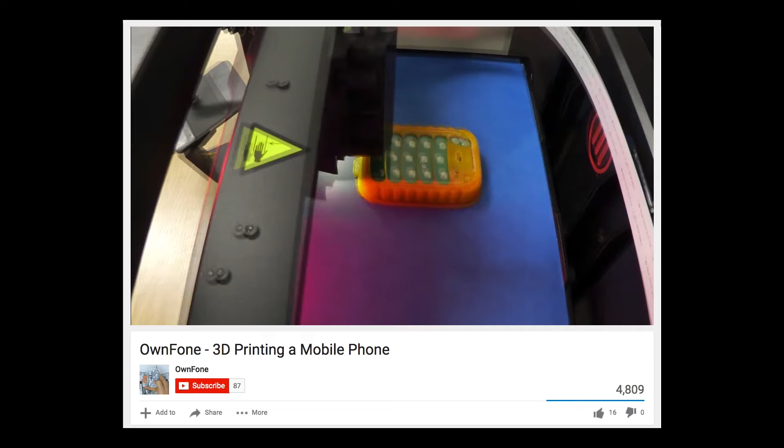So last year we talked about, again, the possibility of being able to 3D print a device like a cell phone. Well, we're starting to get in that direction here. Now, we just talked about 3D printing technologies where you could print a structure, a structural shell, for example, for a cell phone, and then be able to print the interconnects using pick and place to be able to drop in chips, device chips. You could start seeing this become more of a reality.

So for me, I've been involved with additive manufacturing for about 25 years. Our first part prints were for the Sonic tray we designed here at Magnet. I printed those parts and presented them at the design review, and the engineers that we did the work for just about fell off the chair. And so right then I realized how impactful additive manufacturing is, can be, and is going to be.

One of the things we do here at Magnet is to engage companies in the additive manufacturing sector and then bring that technology to people that might not normally use it. So you wouldn't think of a stamper as being somebody that could use additive manufacturing to make parts, but we can show you how to do that. Same way with injection molders. Same way with people that do textiles. So that's where I see a huge transformative element to this technology.

The classic quote I recite from Terry Wohlers is the fact that if you're not running in this space, you're falling behind. So what that means is companies should have a bullet point on their monthly strategic meeting: what are we doing in additive? And if that isn't there, they're falling behind, because additive is on an asymptotic growth curve and there's no stopping this technology. Some of the supply chain transitions that we are in the preamble of right now are going to be transformative. Because this technology is evolving, we're going to be able to print faster, better, stronger parts.

One of the interesting aspects of additive manufacturing is that we can take a scan from a part, regardless of where that part came from, get it into our CAD system, manipulate, modify it, and actually make that part. So there are some issues potentially with people actually getting into copyright infringement. Very easy to do that. So this is a good example of reverse engineering a part.

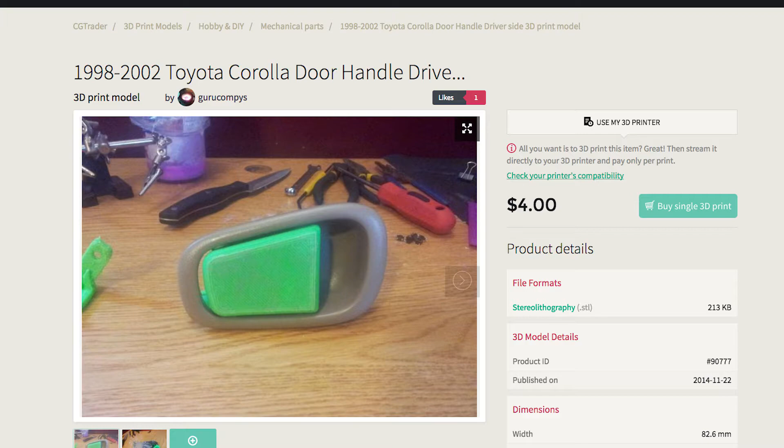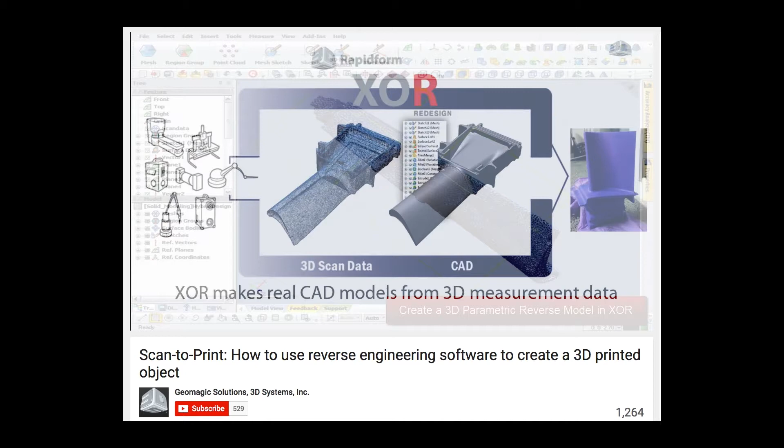We know that some of the smartphone companies have purchased 3D scanning companies. So we could start seeing this technology being democratized. At the same time, there is a need for precision scanning, and there are companies out there that are trying to meet that challenge. And the real issue with precision scanning is reverse engineering. Reverse engineering of spare parts, reverse engineering of hard-to-find parts. That's where precision 3D scanning can be necessary in order to have a part that may fit into a larger system such as an automobile or an aircraft.

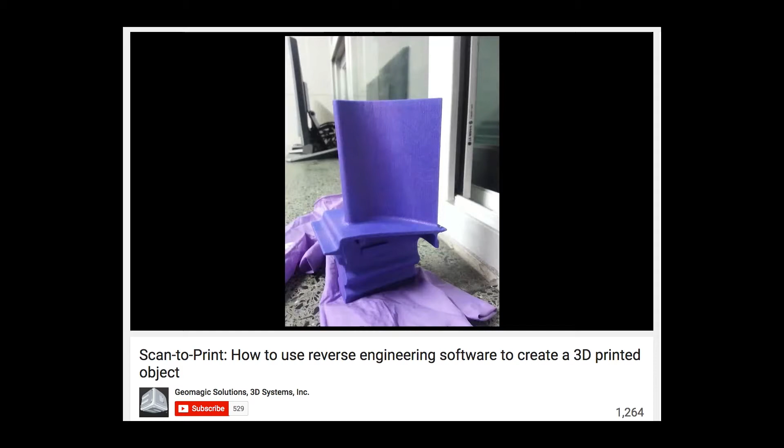Talk about spare parts. Lowe's Innovation Lab recently partnered with a company called Authentise to put 3D printing in stores. It took 6 months to pass legal review, I'm told, and I'm sure even then there was a highly qualified yes, and Lowe's was apprised of the risk. Spare parts like automobile parts can be scanned and printed. We know this. Some companies are understandably concerned about their customers having the ability to scan replacement parts for the big machines they purchased instead of purchasing the parts as they always have from the OEM. It's a significant loss of revenue and creates product liability issues, warranty issues, IP issues.

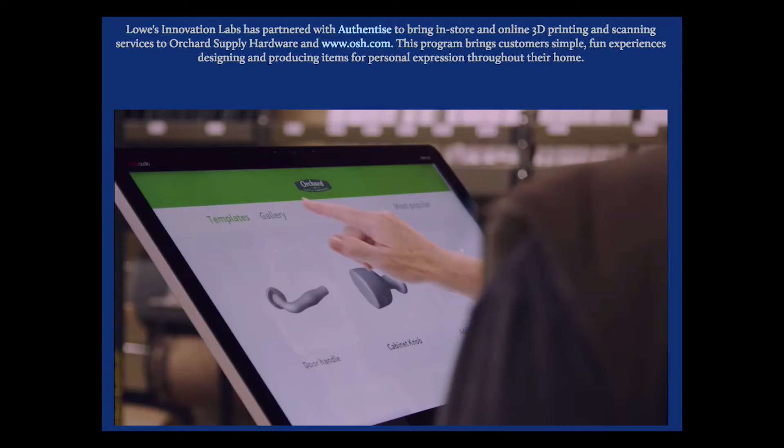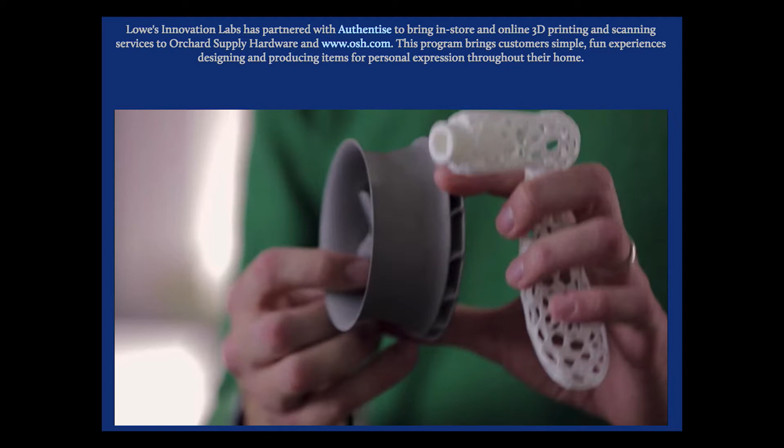Now Lowe's is going to roll out a scanning service in certain stores. Customers will be able to bring files into the stores and have the parts printed, or bring in a functional object such as an out-of-stock light switch or a spare part, and get that scanned and then printed right in the store. Also, design services will be offered. So from the back of the customer's envelope to a CAD drawing to the final physical thing.

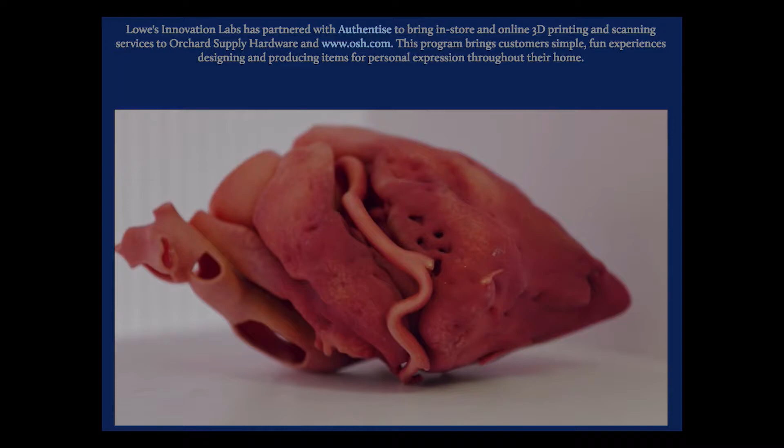Now big box stores, Lowe's won't be the only one, can work with customers to print out of stock items, and there is a huge demand for this. So Local Motors is a company that actually is printing a car. So you can print a car in 44 hours.

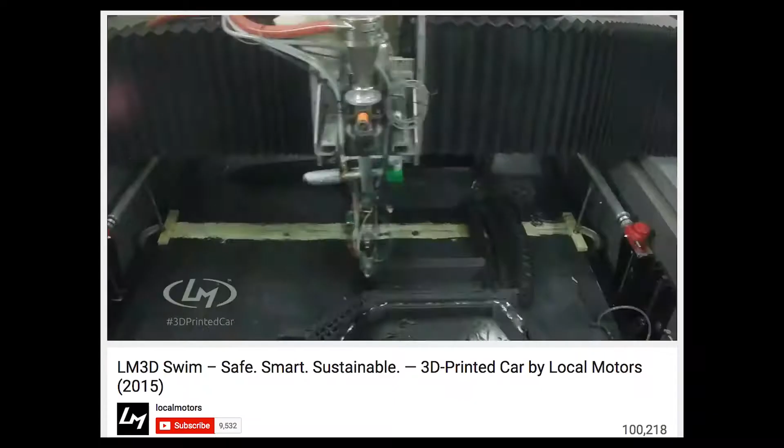They put in a lot of the hardware, so electrical wiring, motors, batteries, drivetrain, things like that are actually conventionally made, but the actual structure of the car is printed. 44 hours, printed car. And their goal is to actually develop that into a manufacturing process where you can actually go and buy a customized car.

Part of my background with Porsche was in the motorsports realm. So just imagine what you can do if you can print parts, right? You can modify parts, you can make things better, cheaper, stronger, faster. So there's things out there that are absolutely at the pinnacle of performance.

So what we have now, I think of it as a convergence. We have software that can design the most complicated, perfect part, so what I call an ideal final result. And now we have equipment that can make that. You know, a decade ago, we could not make some of the parts that we could design.

So aerospace, Elon Musk is using this technology to take a price point to get 1 pound of material into low Earth orbit to $1,000. That's their goal. So right now, we're in the $15,000, $10,000 range. Elon Musk's goal is to take it to 1,000, and he's doing that with a lot of additive manufacturing equipment. So they print their nozzles, they print a lot of engine parts, they print hardware, fabrication, brackets, things like that,

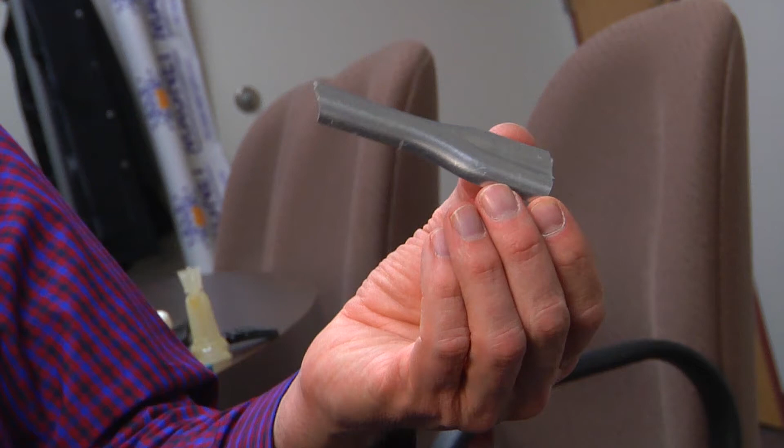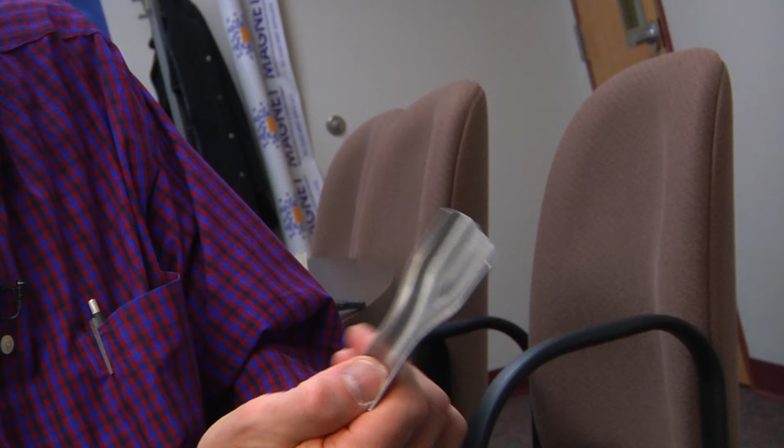all with AM technology. But this is an aluminum part printed off of Ultem, which is an FDM, high temp material, high strength material, and then hydroformed. So conventional tool for this to be a stamped part is 8 weeks away and probably $50,000. The tool to make this part is 4 hours away and $350.

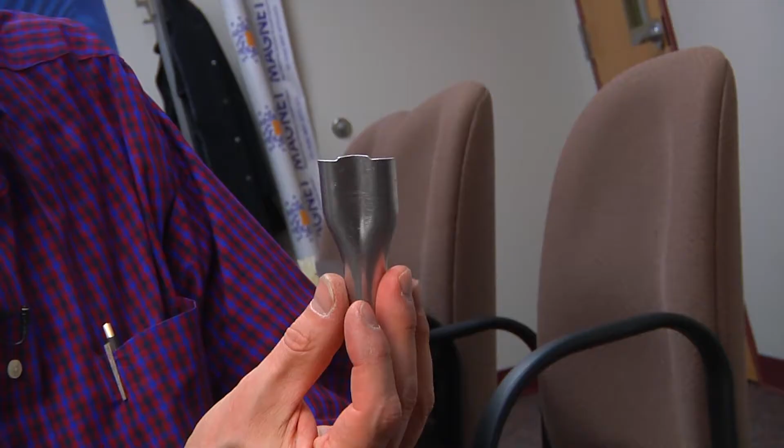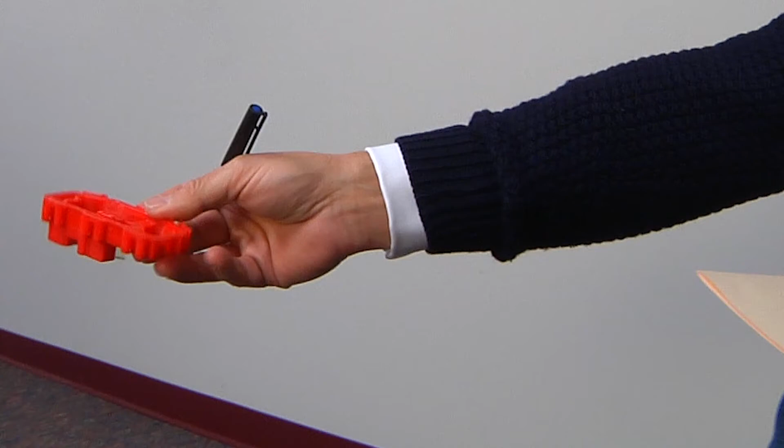So we're not taking time out by transitioning weeks to days. We're taking time out by transitioning weeks to hours. And that's how transformative additive manufacturing can be. This is I think 52 days to 2 days, and $58,000 to $2,800. So it's in the 98% reduction in time and cost.

There's a lot of propriety in the actual composition of that materials, right? So that's one of the revenue streams for Stratasys and Objet is the raw materials. They want to give you the equipment, and then the revenue stream comes in on the raw materials. So it's sort of like HP and the print cartridges.

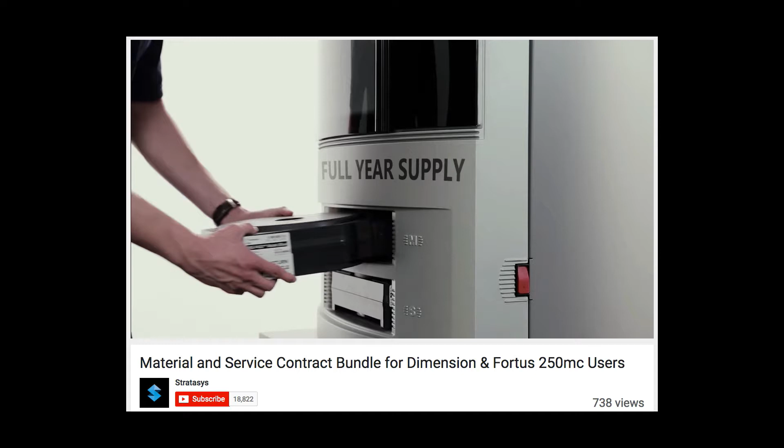You know, you buy a $45 printer, and then the printer cartridges are $30 or something like that, and Gillette and the razor. So they give you the razor, and then you have to buy blades for the next 10 years or something like that. So that's their business model.

So materials will be very important as we move from prototyping into commercial embodiments. And not only will the machines that we use to make the products be patentable and the software and the processes used with the machines, but also the materials. But I think as a chemist, one of the most important things that we can consider are the commercial aspects of trade secrets and how we protect those materials from competitive knowledge with trade secrets as opposed to patent protection.

When we think about the material properties, 5 years ago, the machines we have here at Magnet, I had a choice of 60 different materials that I could put in that machine to create parts from. Now it's over 660 different materials I can put into the equipment downstairs. So what that gives me is a very unique potential raw material selection for actual production.

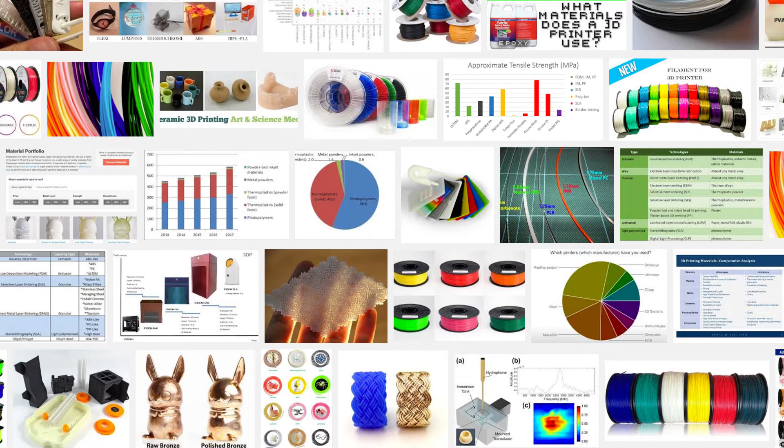So rather than having prototype parts, we transition out of the prototype arena and into the production arena. So we can actually print real parts that go into production equipment right now.

Materials lend themselves to trade secret protection much more than the processes and the machines used to produce 3D printed objects, because they can't be reverse engineered for the most part, and so the chemical makeup of those materials can be protected without going to the patent office.

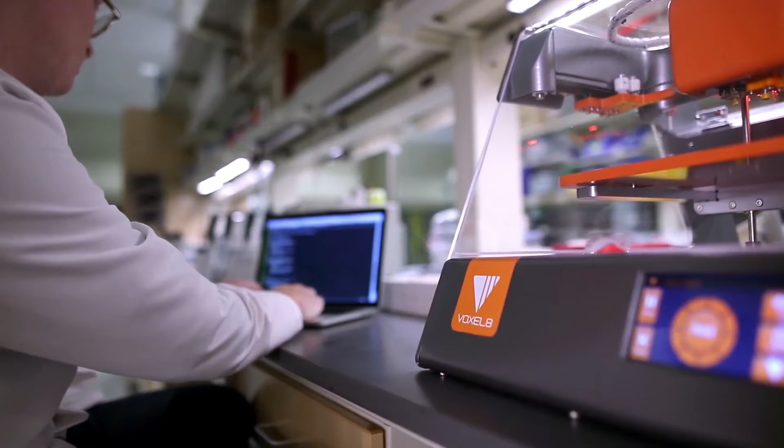A technology company making an impact is Voxel8, hatched in a Harvard lab by Dr. Jennifer Lewis. The mission is to print functional objects, to advance materials to the extent that totally functional objects can be printed out in one build. Voxel8 focuses on conductive inks to embed electronics. Multi-material print heads were developed for this purpose.

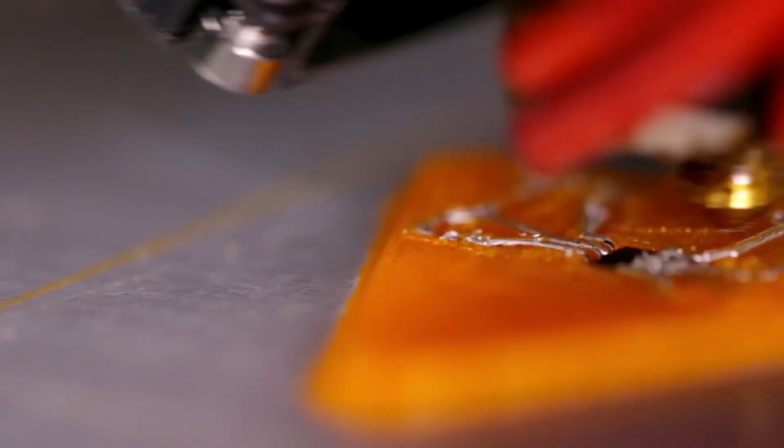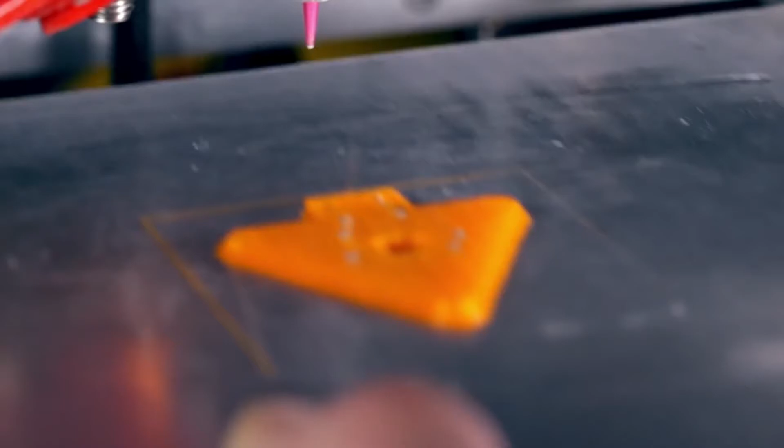Mixing, switching nozzles, print metals to ceramics to polymers, incorporating functional and flexible electronics. One nozzle extruding plastic, one nozzle extruding conductive ink. Print the wires for wearable sensors, wear a bandage on your knee, and receive data about the body. The interesting thing is that Voxel8 is focused on the desktop. It recently raised $12 million in financing and is rolling out the developer's kit for the desktop.

Another exciting 3D company I became acquainted with at CES this year is Carbon 3D. Raised $100 million last August, led by Google Ventures and Sequoia. Carbon 3D asks the philosophical question, does the part being printed have the necessary qualities to be a final part in an automobile, in an airplane, etc.?

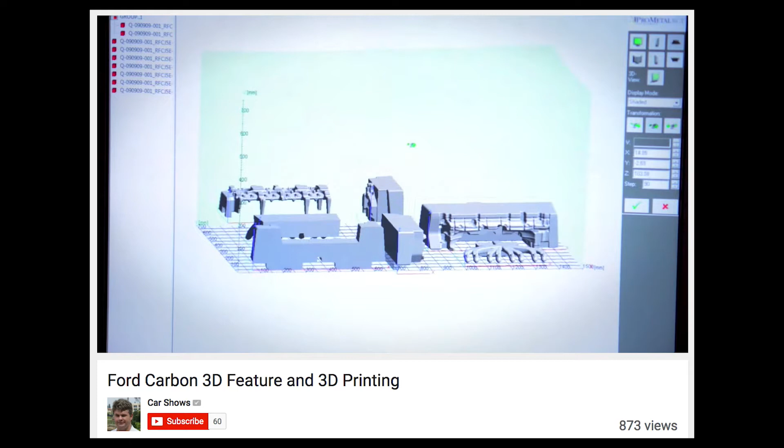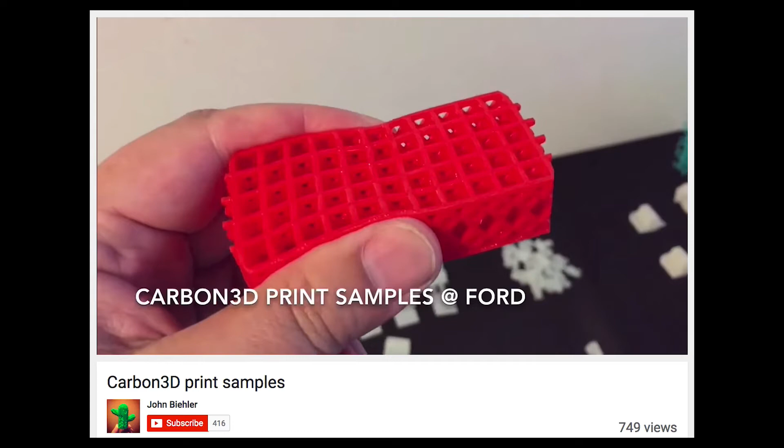And that all comes down to parts printed with the right materials, which is the focus of Carbon 3D. In other words, does the part have the durability to operate under the hood? Carbon 3D says it wants to own the intersection of hardware, software, and molecular science. We know that the need for speed and more robust materials at reasonable prices will drive mass adoption of additive

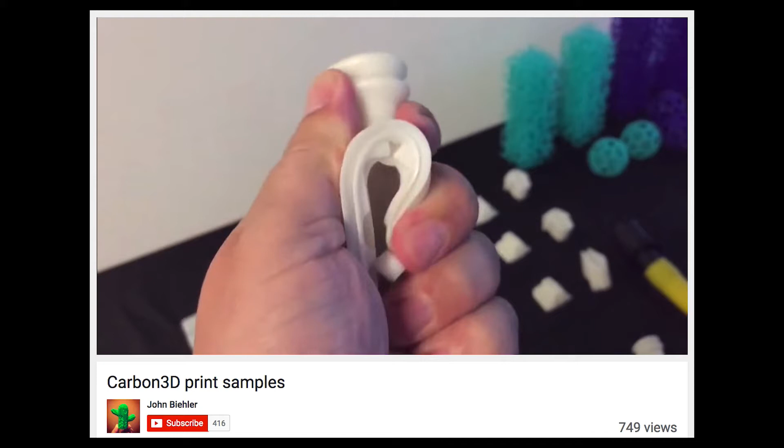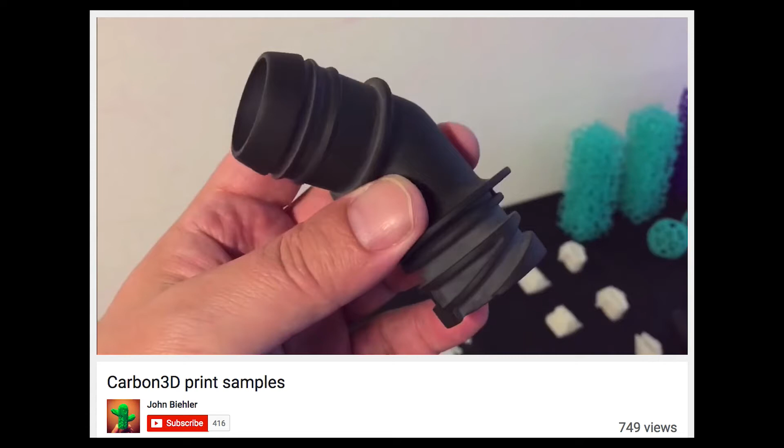in manufacturing. Carbon 3D has some exciting materials, rigid materials, semi-rigid materials that can be used in hinges and clips, materials perfect for surgical tools, great color gradations, all in one build, all the beautiful colors of injection molding, all the complexity of 3D printing. Silicon Valley has always been really good at software, now it's getting great at molecular science too.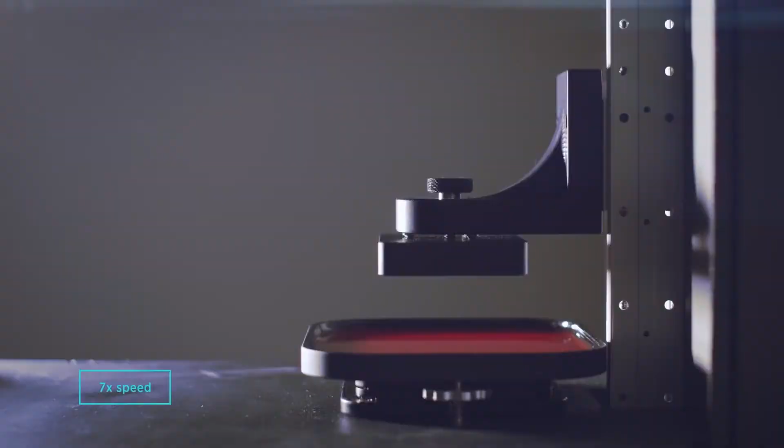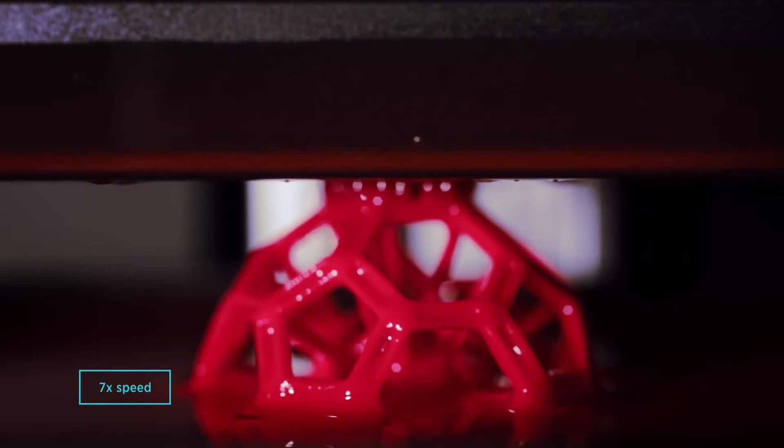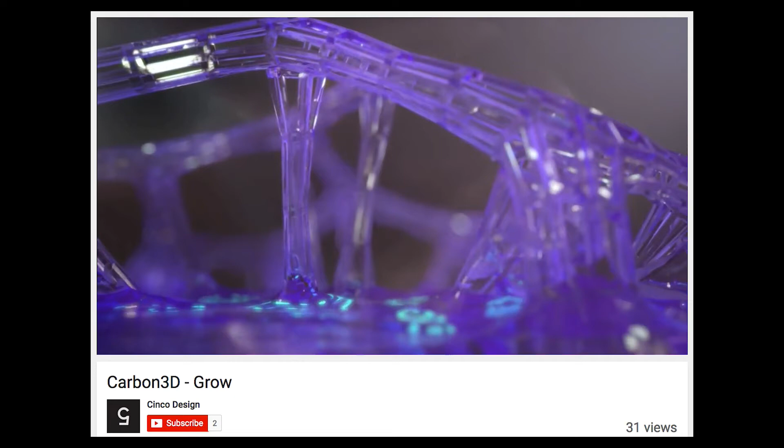Carbon 3D takes a different approach, and so parts that used to be made in hours can now be made in minutes. And so that's a significant paradigm shift. Now they're doing plastic parts with this technology, but the speeds that they're talking about, now we can start looking at other applications. So with CLIP, Carbon 3D targets the automotive industry, consumer electronics, athletic apparel, aerospace, among others. And obviously these industries are very interested based on Carbon 3D's high valuation last August from Google Ventures and Sequoia.

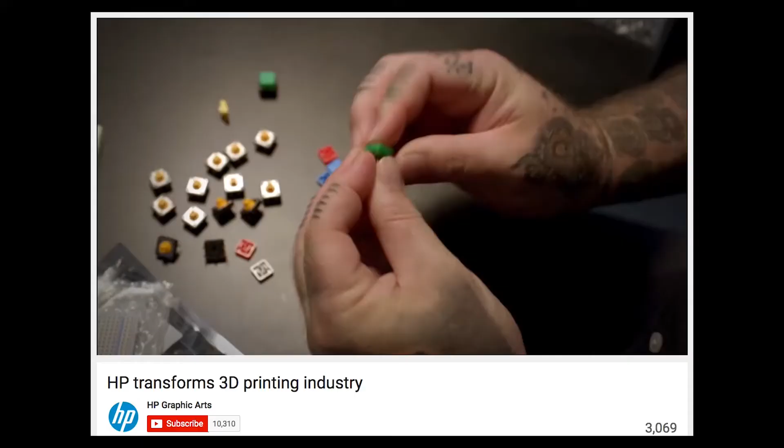What seems completely logical and is happening is that many 2D printing manufacturing companies are now launching 3D printing machines. In my opinion, at CES this year, HP was the most impressive. Thermal inkjet technology is what it's good at. A density of nozzles within a defined space. No moving parts because it's thermal technology. Each print head has 10,000 nozzles, and each can fire 48,000 times a second. That is a lot of data.

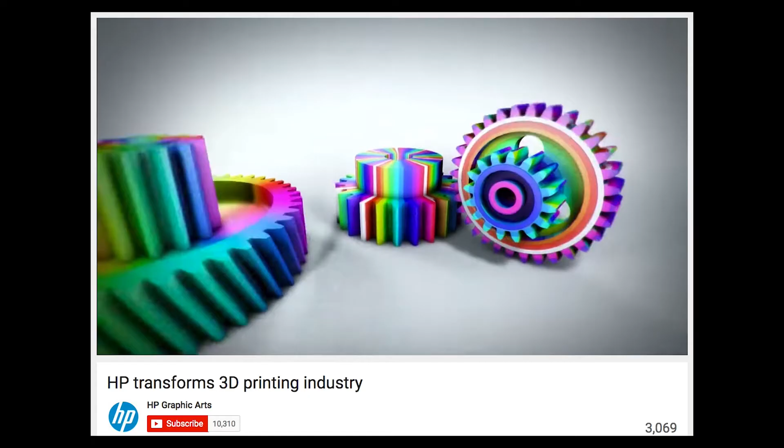HP also uses multi-jet fusion technology. It's accelerating the speed of builds. Hewlett-Packard, HP, now coming out with printing technology. Multi-jet fusion is what they call it. Multi-jet fusion, it's again a nexus between materials, in this case primarily the resins that are being used to bond materials, as well as the printing process.

Now they haven't come out on the street yet with their machine, but they are focused on business and industrial applications, again looking at production. It's plastics again, so polymeric-based applications, polymeric-based materials, but they're looking to increase the speed as well. And so HP also brings, of course, their entire distribution network, their supply chain, what a lot of current 3D printing manufacturers don't have. So it's possible that we could see a significant sea change with that technology.

So speed to market, speed of the process, enabling speed to market, enabling new market opportunities, and materials being a significant driver. When things are digitized, ones and zeros, we need fantastic technology to transform the digits back to physical form, and HP is one company providing this.

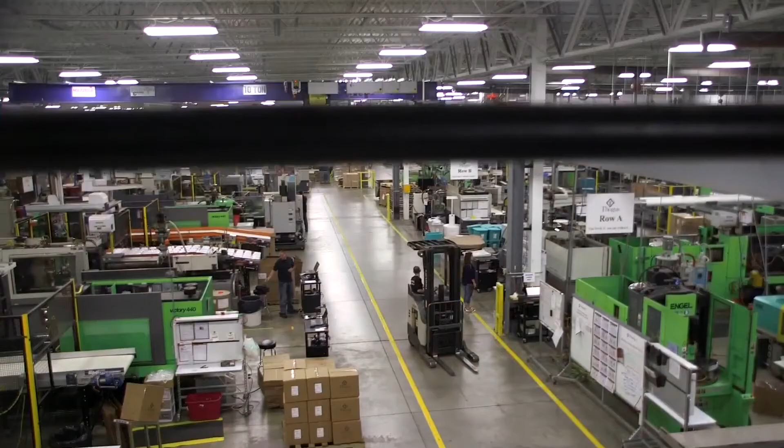I look at Northeast Ohio. This is the rising of the Phoenix. Within 500 miles of Northeast Ohio, 60% of the manufacturing base. We have the skill sets, we've got the toolbox, we've got the resources here, and we're talking about the sexiest story in manufacturing, which is 3D printing. It completely flipped a traditional manufacturing company into an advanced manufacturing company.

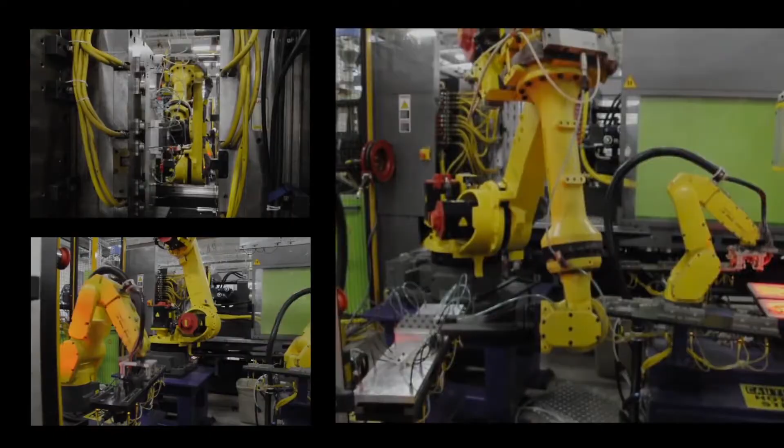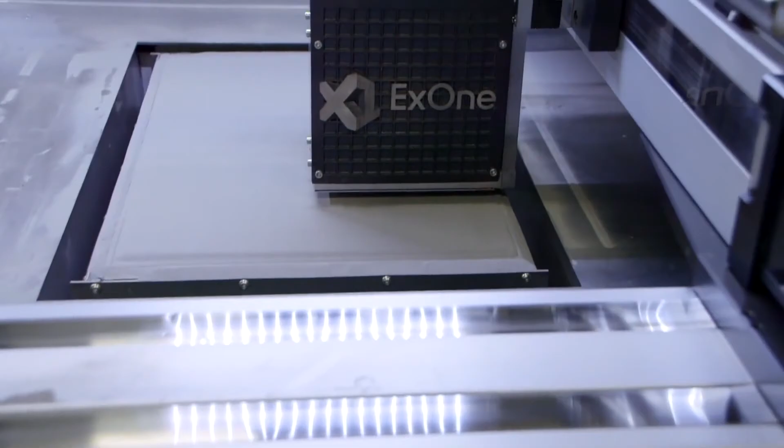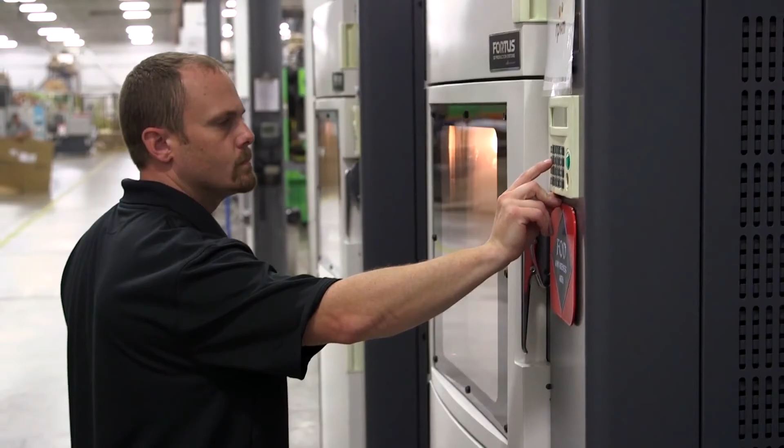Manufacturing, as we know it, has changed dramatically. Advanced manufacturing is the dawn of the new day. You're combining traditional processes with 3D printing, but it's driven by applications, and it's unique to each individual's opportunity or new product that they want to create. What we see the future will hold is we are changing from design for manufacturing to manufacturing by design. This is the intersection of software, materials, design, and process.

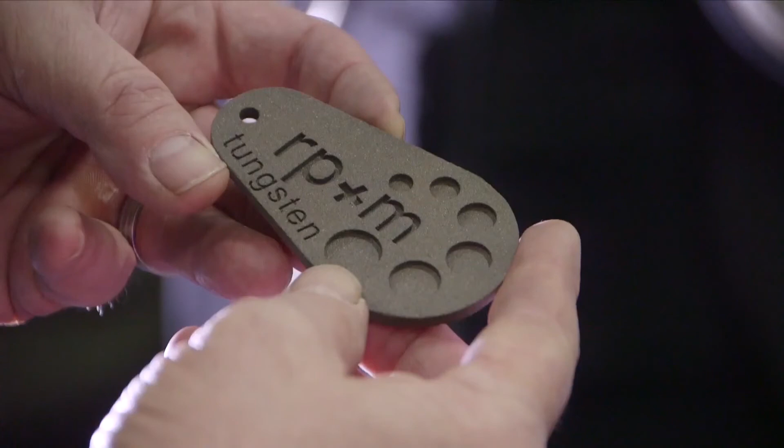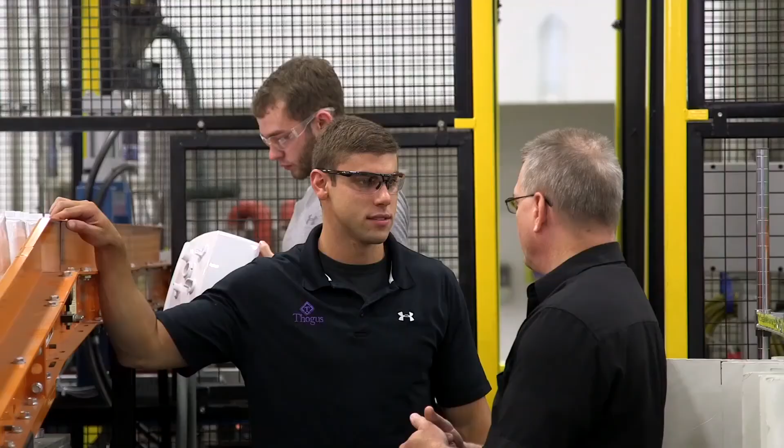As we continue to iterate down the road, manufacturing will continue to become more specific, mass customization versus mass production. We have been able to grow sustainably year after year because we bring value to the table each and every day. Whether it's our culture and our people, whether it's our technology and our equipment, it ultimately boils down to you've got to build relationships on the foundation of trust. We have demonstrated over and over again that our clients can trust us.

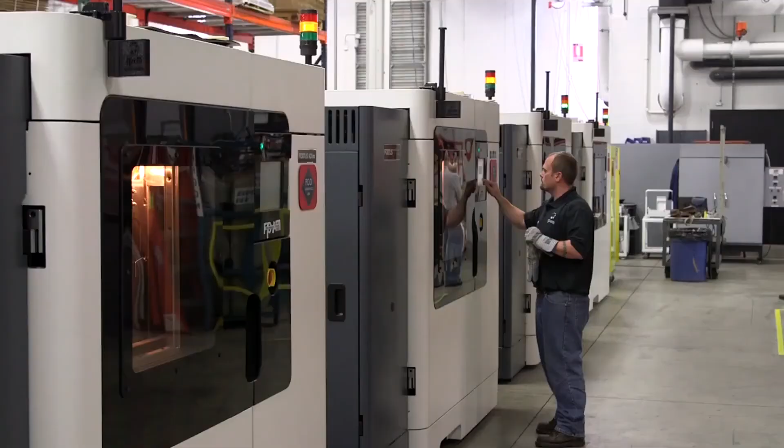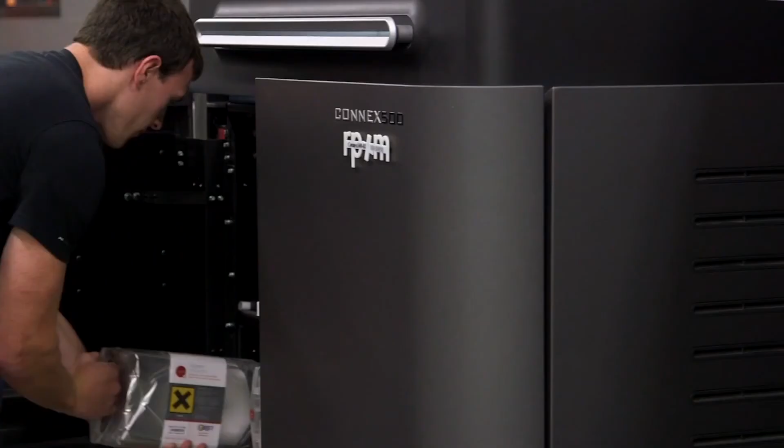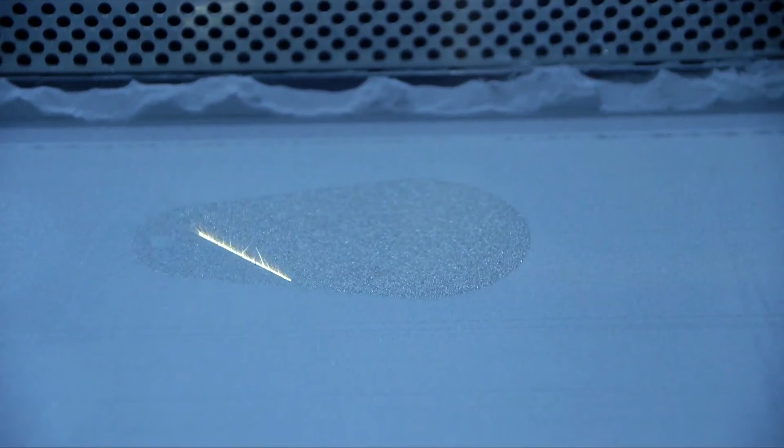And we help our clients meet their goals and their challenges by trying to seek and find new solutions that they don't have time to find. And we bring those solutions to the table. That's why our customers come back over and over again. You have to build a strategy, a short, a mid, and a long-term strategy around 3D printing and how does it impact your business. Our customers have cost constraints, they've got timelines, they've got budgets, they've got resources.

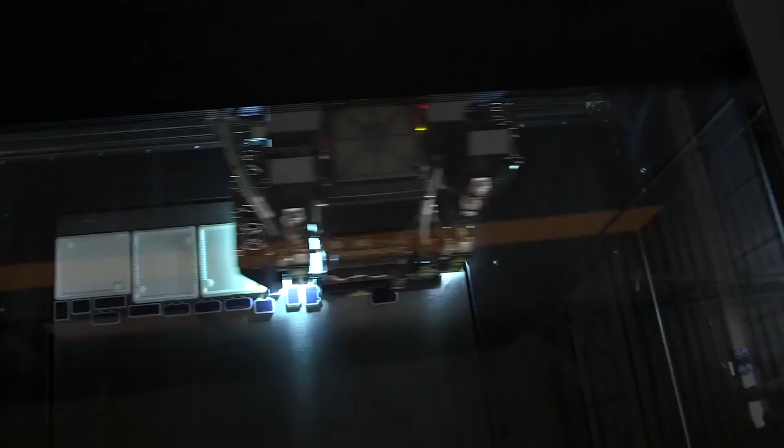We look to see where the waste is. We're a problem solver. We create solutions for our clients. Having a combination of the technologies together creates the ultimate solution. We are going to build the manufacturing revolution in the Midwest. Additive is going to drive it. Having those toolkits all working together to collaborate will create a much more harmonious and successful economic region.